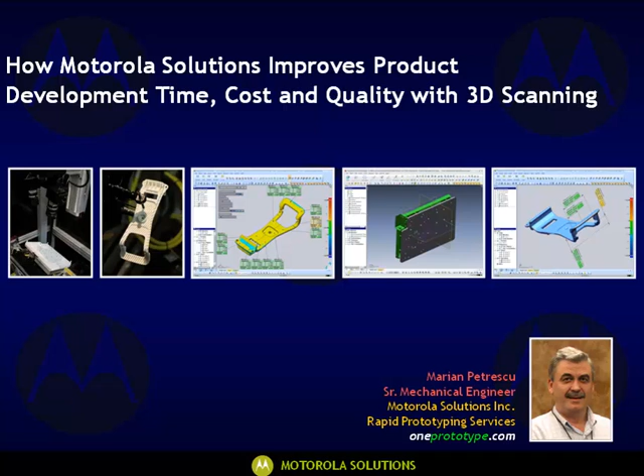As outlined, I'm going to talk shortly about who Motorola Solutions is, who Capture3D is, who Rapidform is.

Then our product development needs at Motorola, and what we used for selecting a good metrology system. We're going to mention the motion control automation system from Capture3D.

We're going to talk about our software tool set for our metrology system, and we're going to talk in detail about Motorola's application using Rapidform XOR and Rapidform XOV as software for redesign, reverse engineering, and analysis and verification.

Finally, we're going to talk about the impact on Motorola's products, introducing our metrology system, a couple of words about future efforts, and finally, we're going to summarize everything.

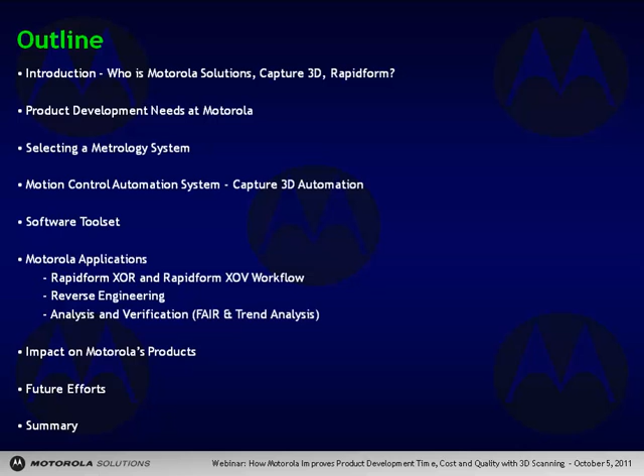Who is Motorola Solutions? Motorola as a company was founded in Chicago, Illinois in 1928 as Galvin Manufacturing Corporation.

The first products Motorola produced were the battery eliminator, which was actually an AC power adapter, and car radios called at the time Motorolas or Victrolas. Over time Motorola produced police and military radios, transponders for space programs, microchips, pagers, cellular phones, televisions, satellites, and so on.

Since January 2011, Motorola separated into two distinct companies, Motorola Solutions and Motorola Mobility.

Motorola Solutions, the company I work for, is a communications company producing trunked radio systems and software for local, state, and federal governments, for police and fire departments, and produces price scanners, which we call Symbol from the former company that produced them.

We also produce mobile computers, postal terminals, and RFID systems. Our facility was founded in 1973 in South Florida, Plantation.

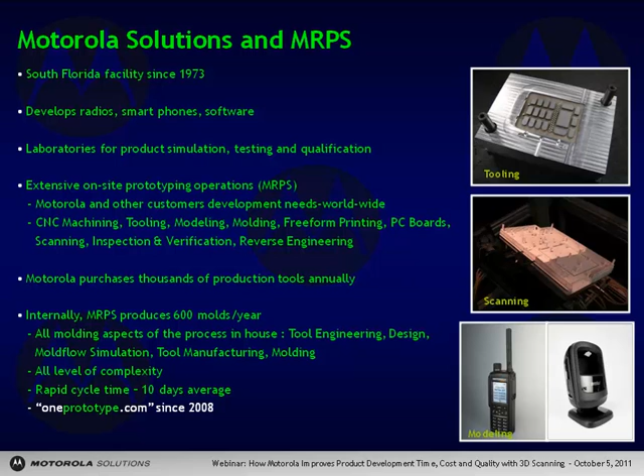Who is Capture3D? Capture3D is a company founded in 1998. The company is headquartered in California and has other offices in Washington, Texas, Michigan, and Connecticut.

Capture3D is a North American integrator of GOM Germany 3D optical measurement solutions, which produce the ATOS 3D scanner and TRITOP digital photogrammetry. Capture3D has over 4,800 system installations worldwide.

It is a company with in-depth process knowledge and experience in various industries like automotive, aerospace, consumer, power generation, casting and forging, injection molding, etc. It is also a developer and manufacturer of standardized and custom automated motion control and robotic solutions.

By the way, we have an automated motion control system introduced here by Capture3D.

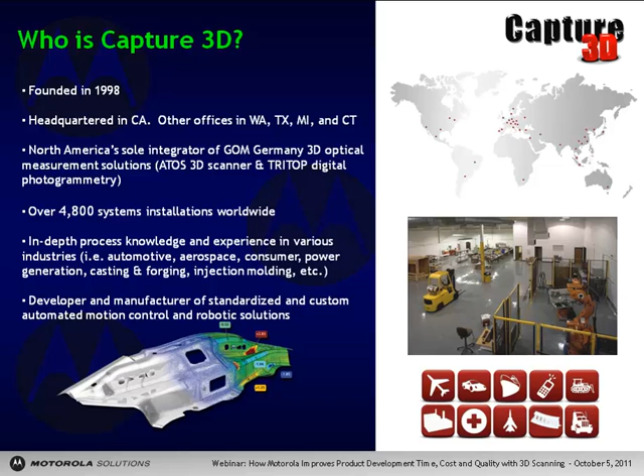Capture3D is also specializing in implementation of high-quality measurement systems and software solutions to aid quality control inspection, rapid prototyping, reverse engineering, CFD, FEA analysis, and additive or rapid manufacturing.

A couple of things about the ATOS 3D scanner, which we have here in Plantation. It can capture rapid geometry, accurate high-resolution data, and is reliable with a stable system architecture. It can measure small to extra-large objects in various configurations: semi-automation, complete automation, portable, laptop, robotic, etc.

Also, Capture3D has an intelligent operating and processing software developed by the same company.

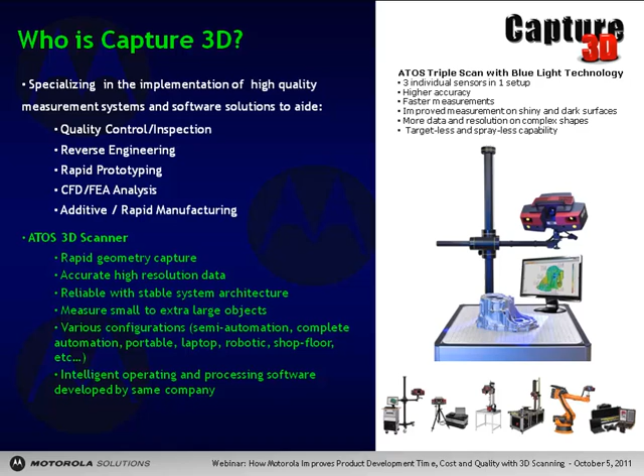Who is Rapidform? Rapidform is a software for reverse engineering and inspection, headquartered in Korea with offices in Denver, San Francisco, Frankfurt, and Tokyo. Rapidform is a global leader in 3D scanning software, with more than 10,000 seats in use worldwide since the company was established in 1998. It's used at Motorola, at 9 of the top 10 automakers, at 7 of the top electronic manufacturers, and at 9 of the top 10 aerospace companies. They are the inventor of parametric reverse engineering software and also the inventor of parametric inspection software.

A couple of things about Rapidform XOR software, the software for reverse engineering: it creates parametric CAD solid models from scans, the fastest path to CAD. It creates native files for ProEngineer, SolidWorks, and other design systems such as CATIA, AutoCAD, and Unigraphics.

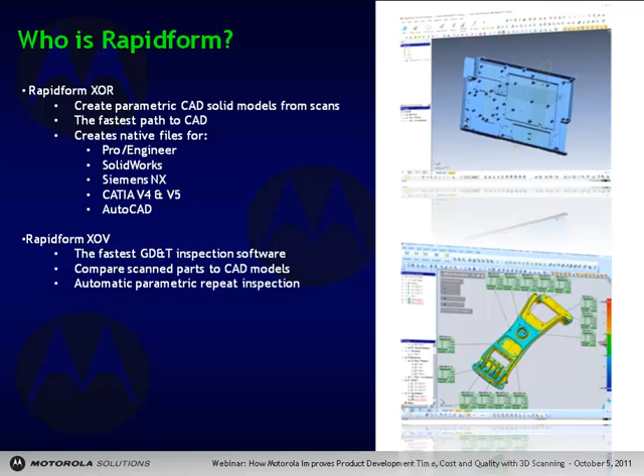Rapidform XOV, the software for analysis and verification, is the fastest geometric dimension and tolerance inspection software. It compares scanned parts to CAD models with automatic parametric repeat inspection. We call this parametric inspection, where the inspection path for a part is used for multiple parts.

Now we're going to talk a little bit about implementation of the 3D scanning metrology system at Motorola. We started with our product development needs at Motorola, where we needed different tools: tools for design, tools for prototyping and modeling, experimentation and testing, and tools for analysis and verification.

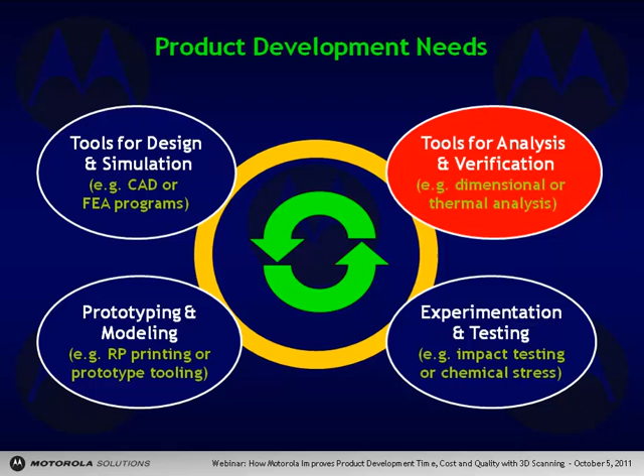We focus more on tools for analysis and verification. Here was the kind of activity that we paid attention to when introducing a 3D scanning metrology system. We had to consider the best choice in implementing the best 3D scanning metrology system.

We have certain applications in dimensional analysis and verification. Our applications are part inspection, part and assembly interaction, part qualification, before and after process or test comparison, tooling cavity number and supplier comparisons, root cause analysis, legacy ID models, and third-party product support.

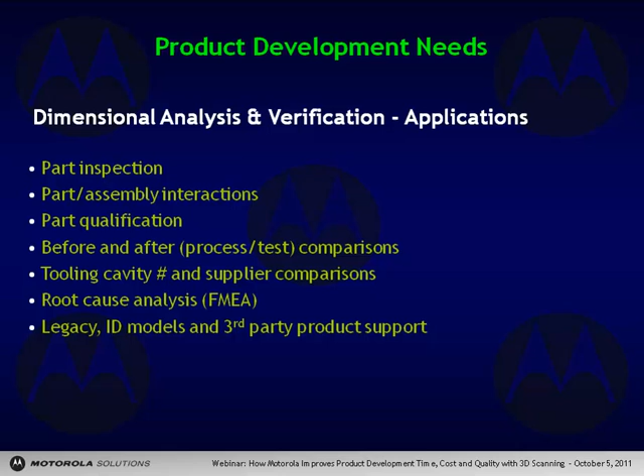We also have certain components for dimensional analysis and verification: injection molded plastic parts, insert and over-molded plastic parts, die-cast parts, machined and formed metal parts, compression molded parts, PC boards, and sub-assemblies like switches, speakers, and connectors.

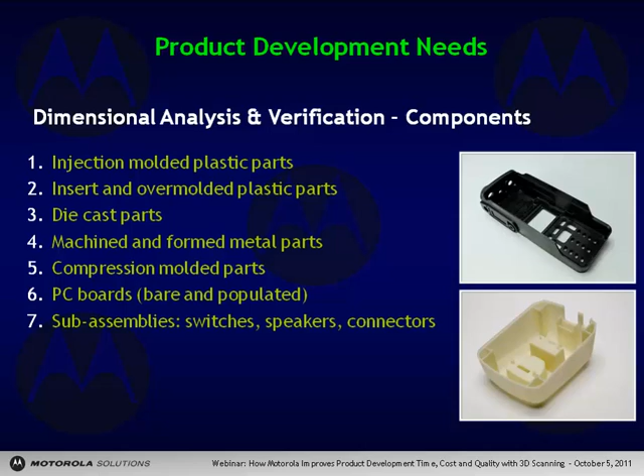Another factor to consider in choosing the scanning metrology system is the system requirements for our projects here at Motorola Plantation. In order of importance for us: speed for setup, scan and post-process; accuracy and repeatability; ease of use for physical process and software; and automation capability, which requires an inspection volume of 300 millimeters cubed, or weight of 5.5 kilos, 12 pounds.

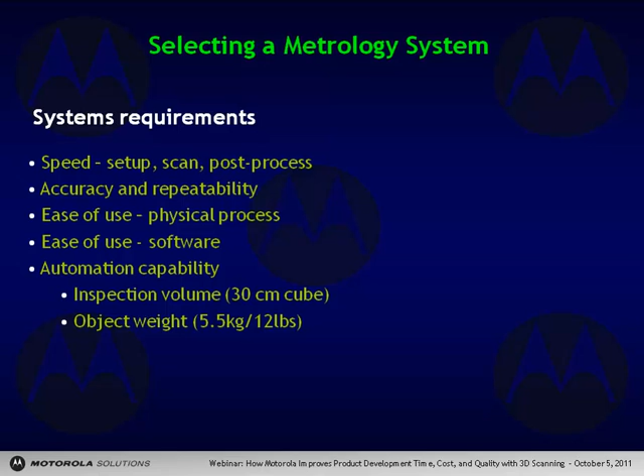If we have some questions at this point.

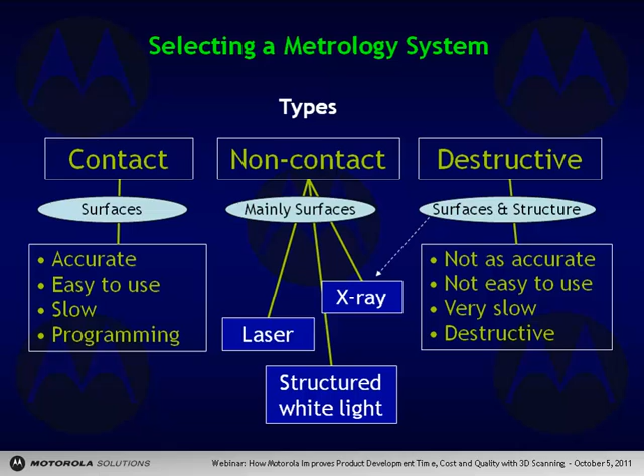After a deep analysis using DSS Digital Six Sigma methodology, a project called Define, Measure, Analyze, Improve and Control, the DMAIC project, we chose from non-contact types the structured white light system. Of course, this was based on what we talked about before regarding our application, our components, the system requirements, the system types, and also the return on investment. This was a very important factor.

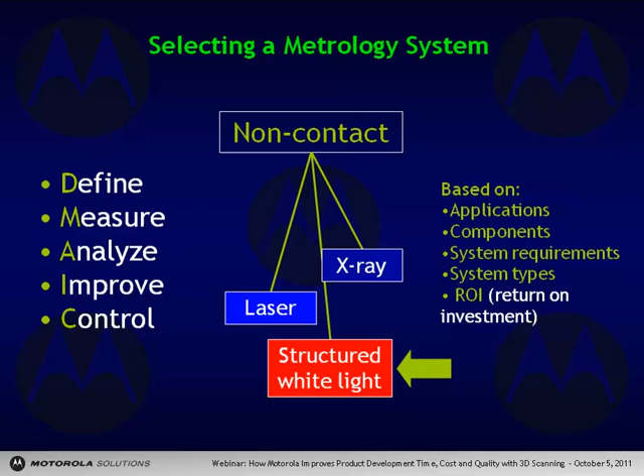So our metrology system looks like this picture. You see the enclosure of automation. We have a 6-axis automation system from Capture3D with the camera system in it. Then we have the PC units here with hard drive, with software interfaces for inspection, for capturing data, and for the automation system.

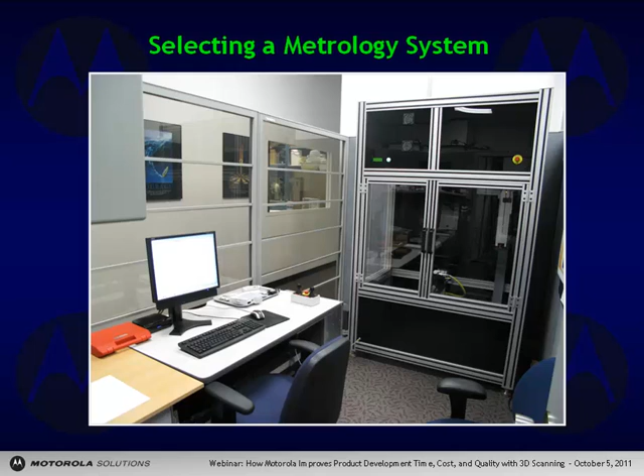So our system consists of a computer unit and the Atos 3D scanner from GOM, Capture3D, an operating software from GOM, V7 Professional, installed by Capture3D, an automation system by Capture3D, motion control automation system, system integration software from Capture3D, and we are also using some tooling and fixturing made at Motorola.

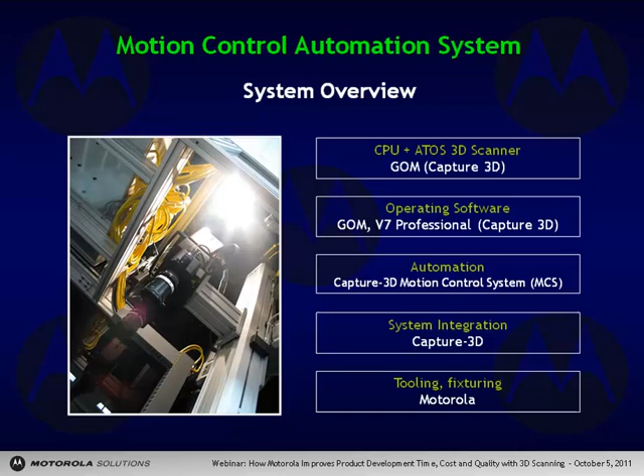So the automation system has 6 axes, 3 rotary axes and 3 linear axes, and also the scanner head assembly is attached to this automation.

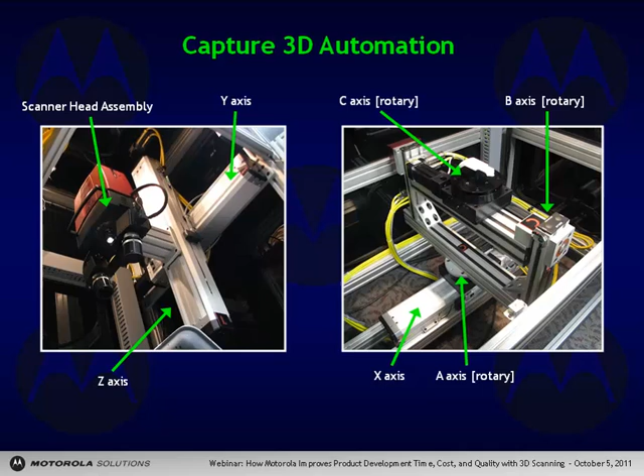What characterizes the Capture3D automation? We can program an automation template, a program, or a protocol for multiple scanning sequences. The automation can achieve any physical orientation, retaining positioning accuracy within 5 microns, which ensures the repeatability and reliability of the system. The template can be rerun by the automation on multiple parts. Also, the system stores templates for different inspection volumes or part orientations.

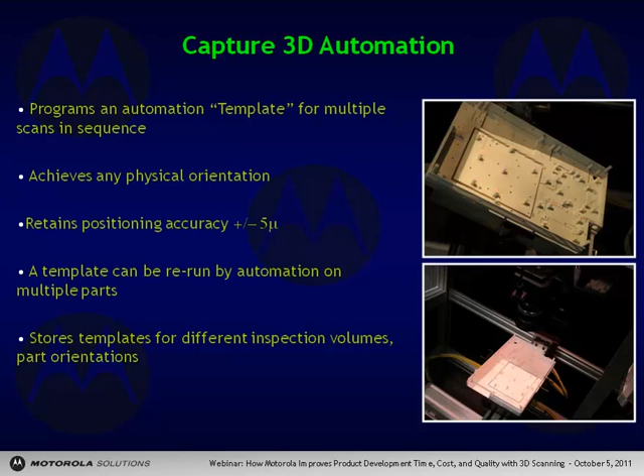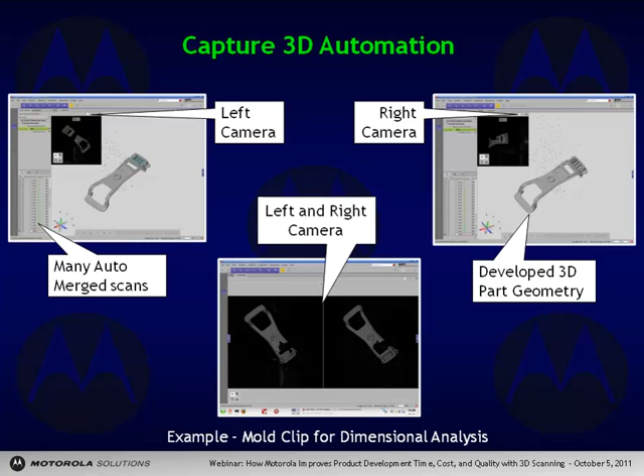This is how V7 Inspect Professional looks like. In scanning a mold clip for dimensional analysis, you can see both cameras, left and right, capturing the data. You can see here on the left how many scans are merged, forming a developed 3D part geometry, and also you can see the scanning process in the picture on the bottom.

For larger parts exceeding 300 millimeters cubed in volume, we can scan them with the automation provided by Capture3D, but we need to limit the number of automation axes in order to avoid any damage to the automation. We can scan weights up to 15 kilos or 30 pounds with full automation, which is very good.

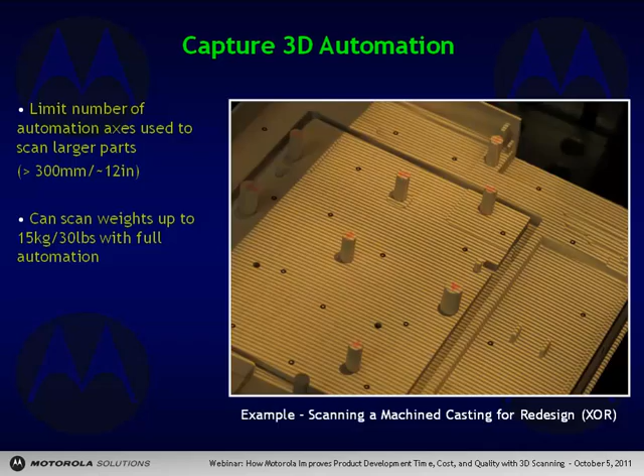In addition to this automation, for reliability and repeatability of the system, we use very simple and low-cost holding fixtures such as frames, clamps, or custom mandrels for special parts like flexible parts. In this picture we can see a flexible keypad made of rubber material. So we pretty much cover all the volume for the automation system in fixturing and tooling for scanning.

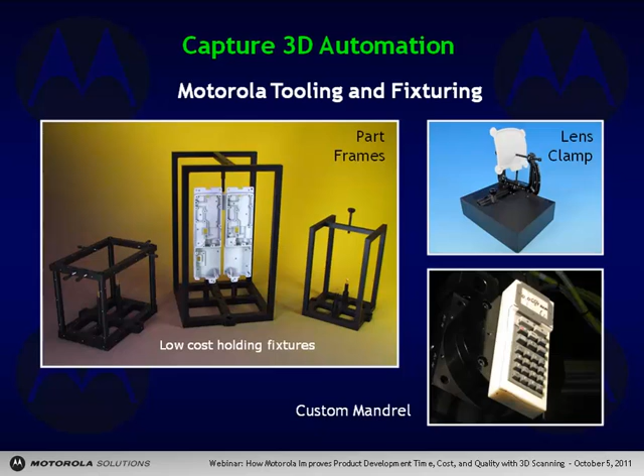As a software tool set for our metrology system, we use design software like Pro-E, iDEAS, SolidWorks. For manufacturing, we're using Mastercam and Cimatron. For dimensional verification, we use scanning software, Capture3D GOM Atos, inspection software, Capture3D GOM Atos V7 Professional, and automation system integration from Capture3D.

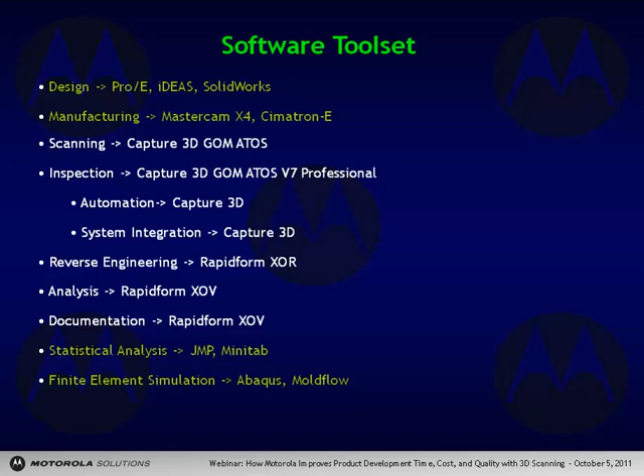Also, we are using reverse engineering software from Rapidform, actually Rapidform XOR. For analysis we are using Rapidform XOV, and for documentation we are also using Rapidform XOV. We have some other software for statistical analysis like Minitab, and finite element simulation like Abaqus or MoldFlow.

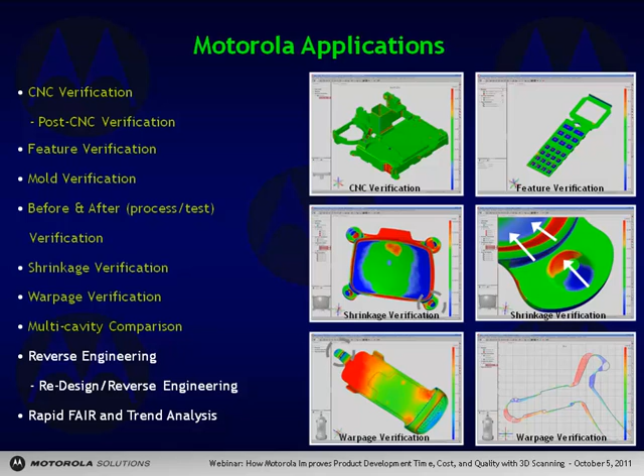Today we focus on reverse engineering application using Rapidform XOR and analysis using Rapidform XOV.

What we use reverse engineering for in our application — most of the applications are about retooling legacy parts with missing or uncertain design data. Our case study today is about capturing legacy design data for creating a new or modified version of products or accessories. Capturing design intent from physical parts, understanding competitive products and models, is another application, as well as creating accurate data for third-party products and accessories to ensure compatibility.

For analysis and verification, we can use all parts, tools, and accessories requiring analysis and verification, of course within the limits of our automation and our scanning system.

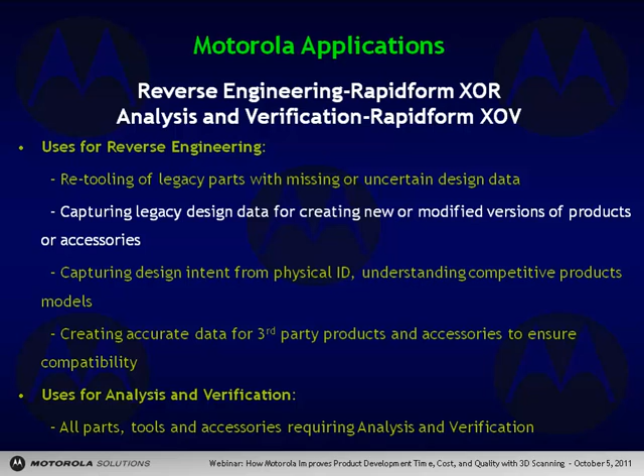Before talking about a case study applying Rapidform XOR for reverse engineering, we're going to show the Rapidform XOR workflow here. So the first step is to import the mesh from the Atos 3D scanner into the Rapidform software. The second step is to align the mesh into the coordinate system of the Rapidform software. Then comes auto feature segmentation, when the software gives us a clue about all the geometries of the scanned part of the mesh data. The next step is to create the CAD model in Rapidform XOR.

Then check the accuracy of that model against the scan data to see how close they are, and basically verify the accuracy. The last step is to LiveTransfer it into a CAD software, either Pro-E, Unigraphics, or another CAD software.

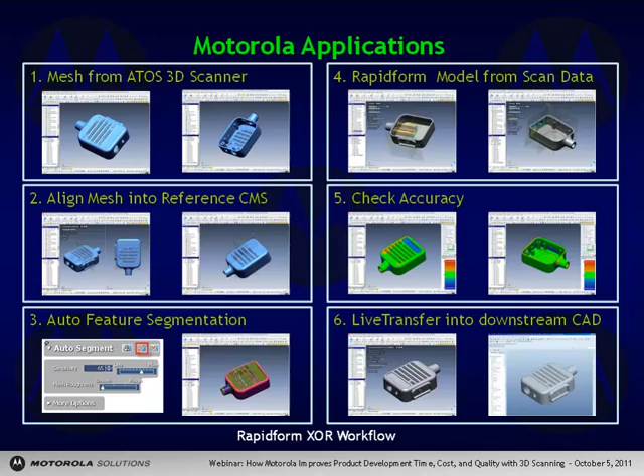So our application case study today refers to a legacy part, a part which doesn't have a good design.

The customer had some issues with a fixture built for this chassis legacy part for assembling some components and boards on the chassis. So for the screw template, the customer is reporting that if he matches up the screw location according to the print, the holes on the fixture template will end up misaligning against the PA heatsink.

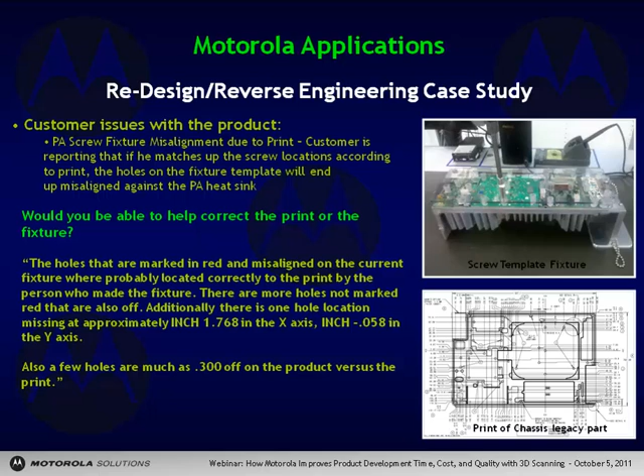So the customer is asking to help correct the print or the fixture. We decided to correct the fixture, capturing the pattern of the holes on the chassis, and having that pattern we also can fix the drawing. So we concluded that the screw fixture and the print do not match the holes pattern on the chassis.

The chassis was modified in the past for heatsink attachment. The holes pattern needs to be captured from the chassis heatsink assembly and the screw fixture redesigned. For this, scanning to capture the holes pattern and reverse engineering are required.

Also, we got the message that the customer tried to use traditional methodologies to solve this problem, and they failed. Probably they failed just because the geometrical feature on the bottom to be captured, the bottom of the holes, because the holes are so small and they're also tapped holes, it's very, very hard to capture them.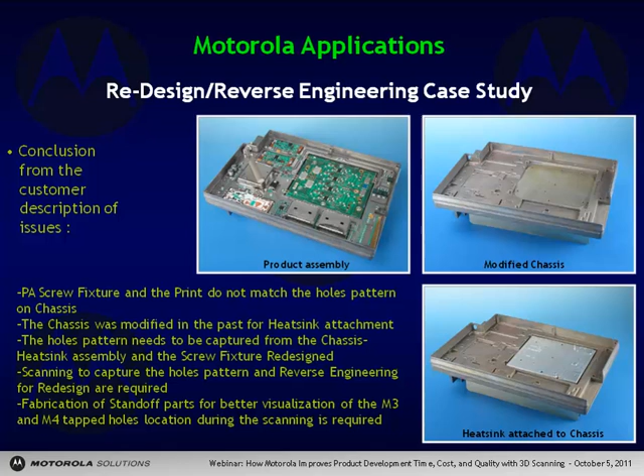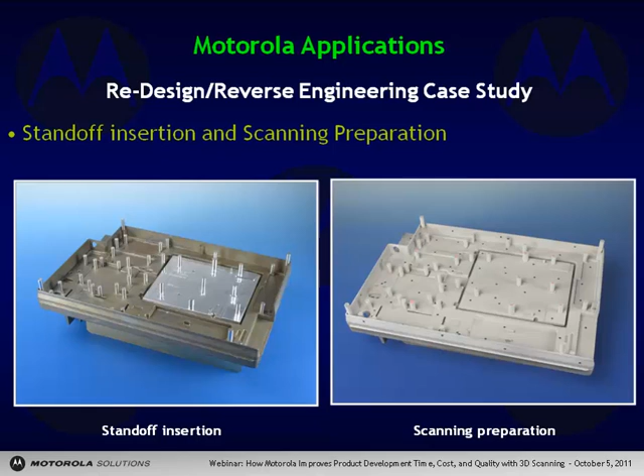So we decided to fabricate some standoffs to better visualize all the holes from the chassis. This was a good step and good idea, because going forward with these standoffs we can easily scan the assembly chassis. So after standoff insertion we made a scanning preparation.

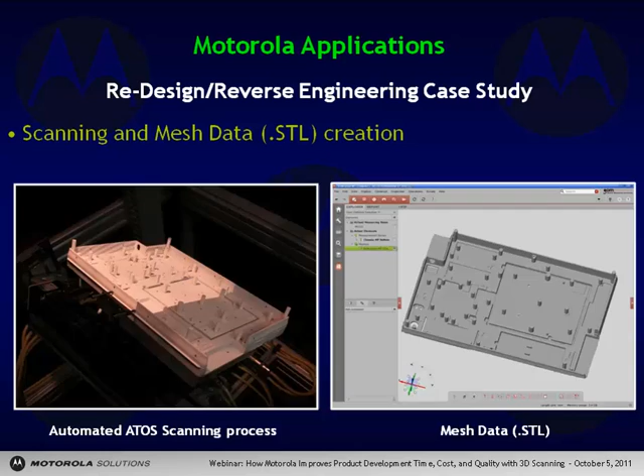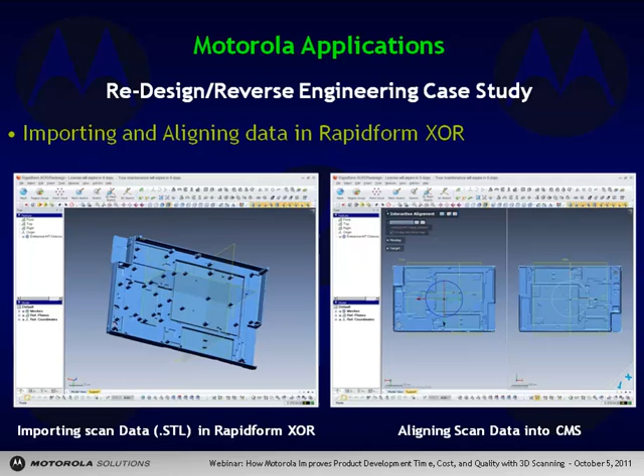We scanned the part with the ATOS automation system. We obtained the mesh data, an STL file, and next we imported that scan data into Rapidform XOR. We aligned the data into the coordinate measurement system of the Rapidform software.

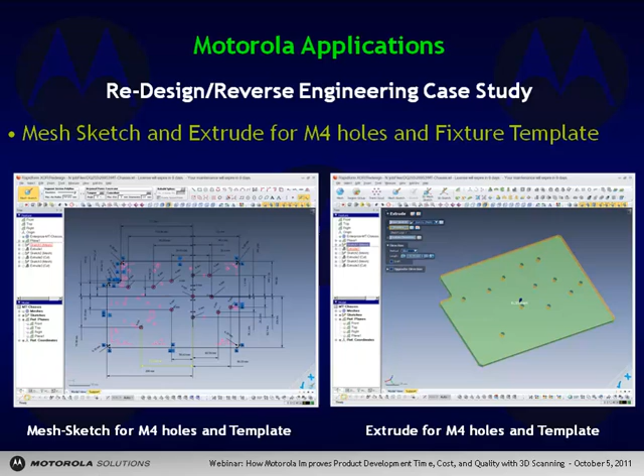We started to model a template for the fixture using different mesh sketches in the Rapidform software. This is one of the mesh sketches for a certain type of holes, tapped holes. This is another mesh sketch for corner alignment holes, and then we cut the corner alignment holes into the template already created.

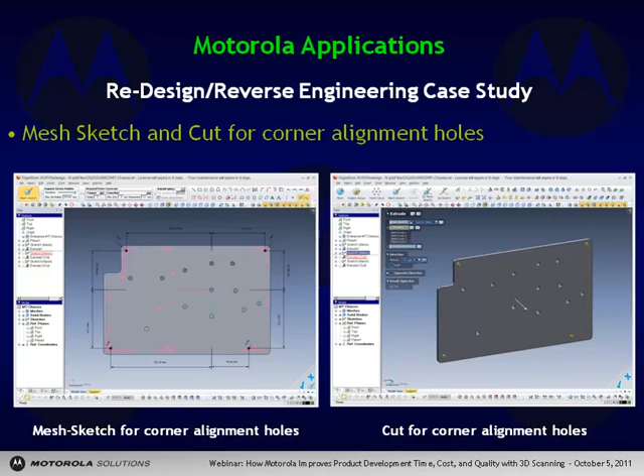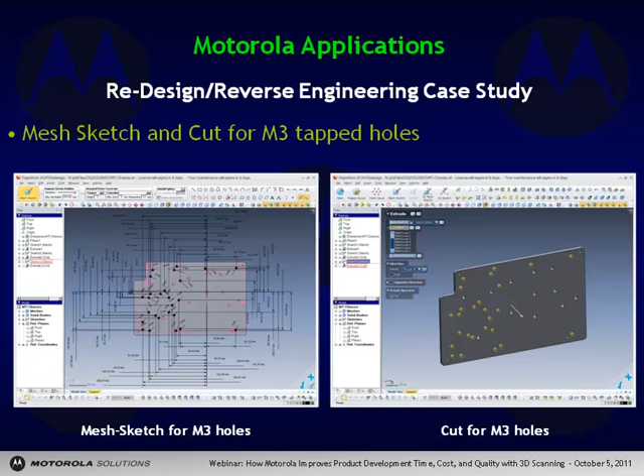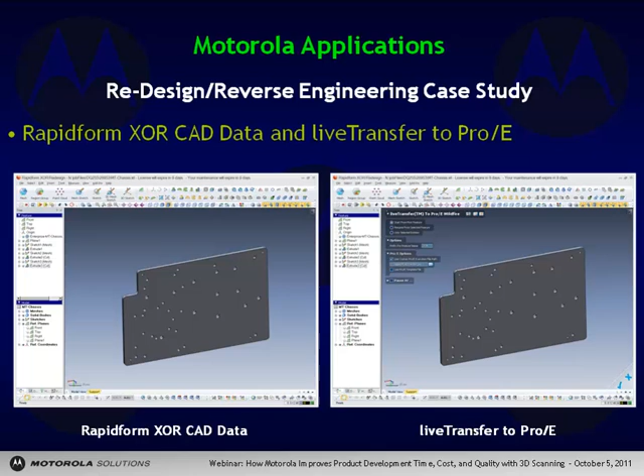Another mesh sketch for another type, M3 holes, and the cut into the 3D model in Rapidform. Finally, we got all the pattern of the holes into the model. We created the model in Rapidform and did a live transfer into ProE software.

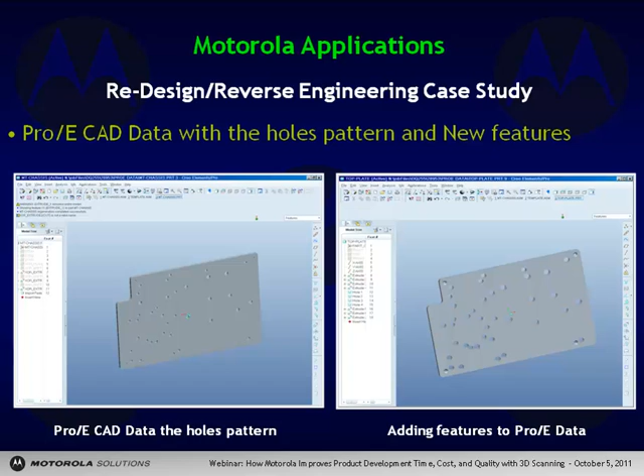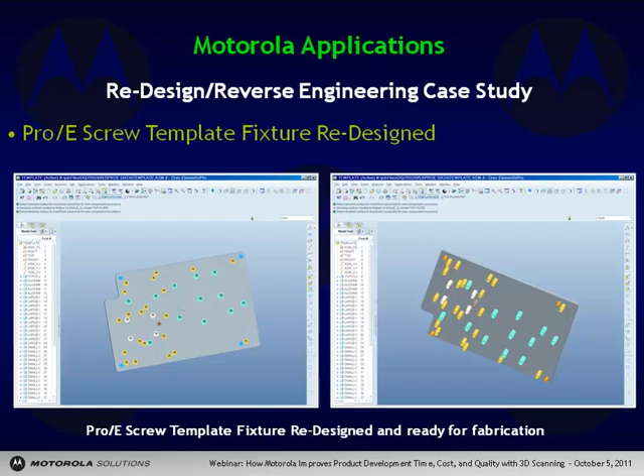Using ProE, we just modified the holes in order to insert all the guides for the screws. And finally, we got the fixture redesigned and refabricated. You can see the fixture fabricated here, and the physical fixture on top of the chassis, working in assembling all the boards and components. So the customer was very happy with this job.

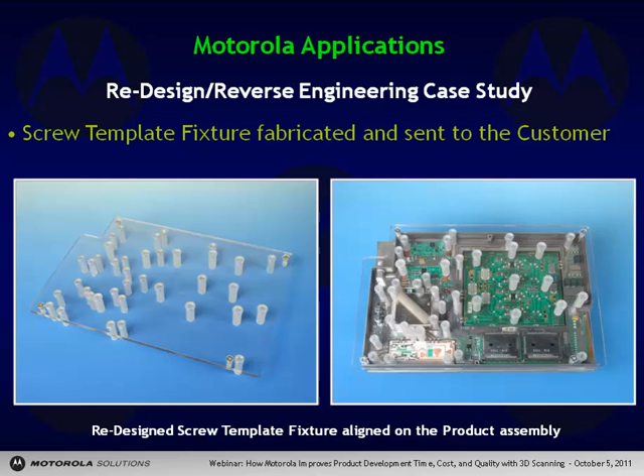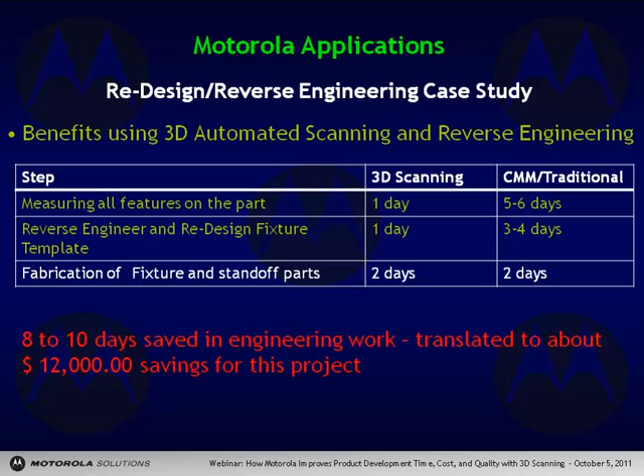For this redesign reverse engineering case study, we spent about 1 day measuring all features on the part, 1 day for the reverse engineering activity, another day comparing with the traditional methodology in measuring all the geometrical features, and with traditional methodology to reverse engineer and do the redesign. We saved about 8 to 10 days in engineering work, which translates to about $12,000 in savings for this particular project.

Again, if there are some questions at this point.

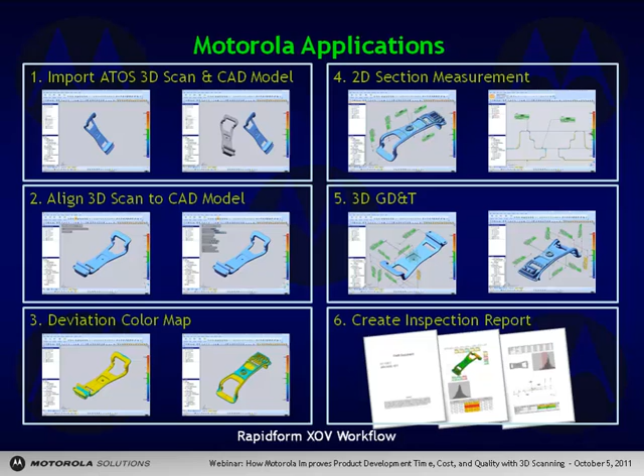Our case study, analysis and verification application: one of Motorola's internal customers requested the tooling and fabrication of several hundred molded lanyard clip TSD plastic parts. The order was very important for our RPTC mold team, the clip being a part of a retail assembly product to be released on the market.

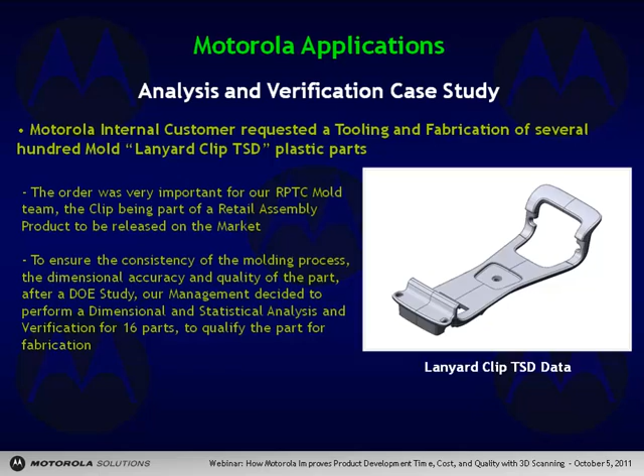To ensure the consistency of the molding process, the dimensional accuracy and quality of the part, after a design of experiment study, our management decided to perform a dimensional and statistical analysis and verification for 16 parts to qualify the parts for fabrication. So we start the process with the first step, scanning and creating the mesh data for all the 16 parts.

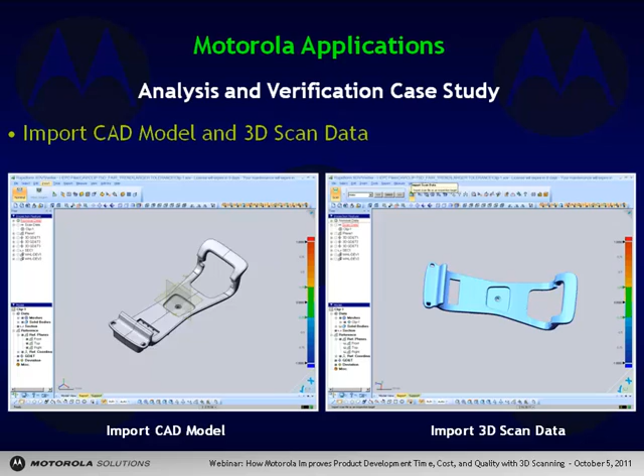Then we import the CAD model into the software along with the scan data, and perform alignment of the 3D scan data to the CAD model. We generate a deviation color map showing hull deviation, in this case for the top or the bottom, and we can also do thickness or all deviation analysis.

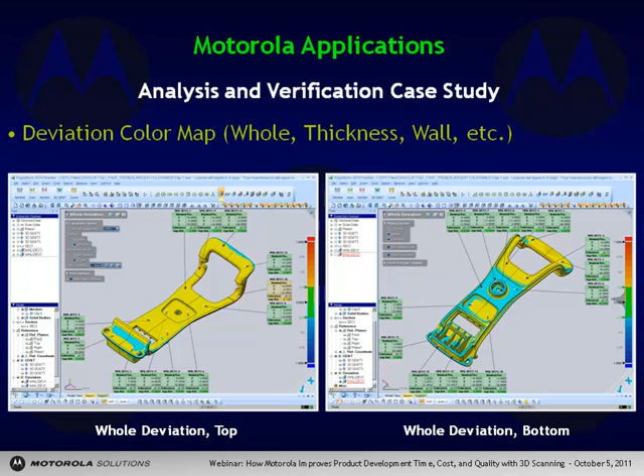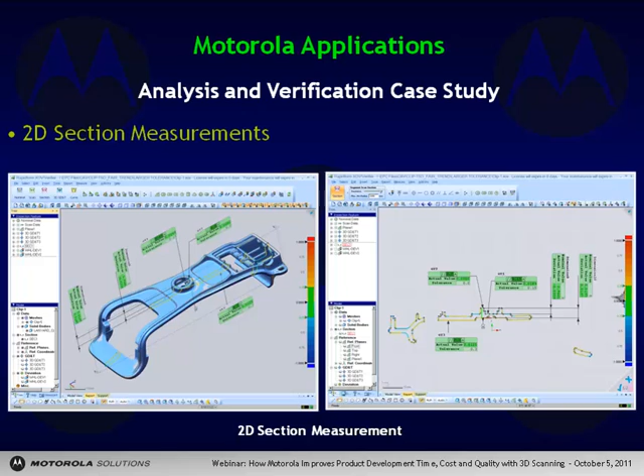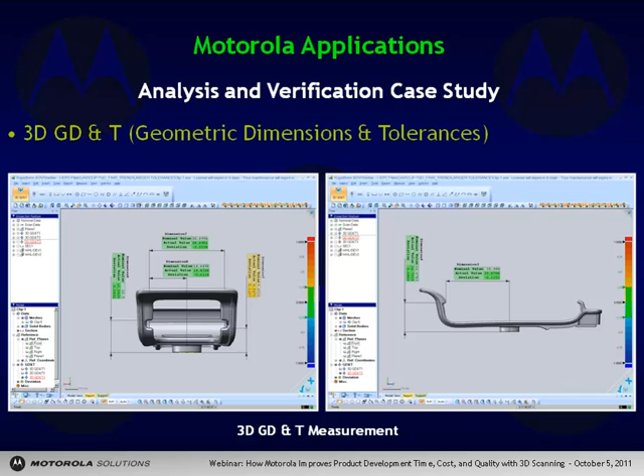Also, we created 3D geometric dimensions and tolerances on different views. Finally, we created an inspection report, a first article inspection report, for each one of all 16 parts.

The reports contain a page with information about the project and the customer, then a database, then the scan data, and then images with two-dimensional sections showing all critical dimensions, all the views with 3D geometrical dimensions and tolerances, the values for all the dimensions, and the whole deviation pages. This is a complete rapid first article inspection document.

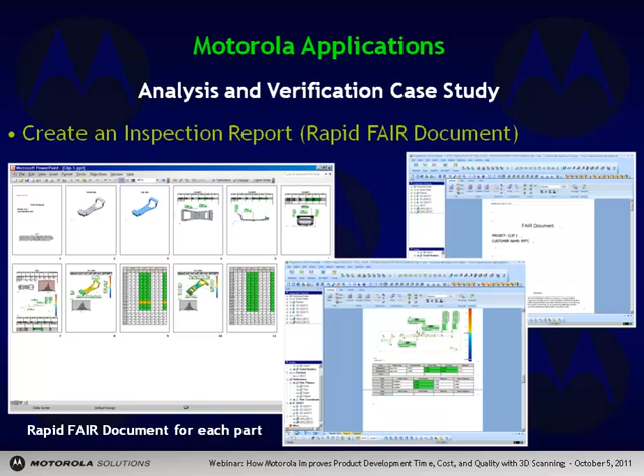For a deeper analysis and verification based on all 16 rapid first article inspection documents saved, we can create a trend analysis report with deep analysis and statistics for each dimension. This is a very, very deep verification with all the dimensions in tables, including statistics like upper limit, lower limit, Cp, Cpk values, and the full spectrum of deviation for each dimension.

So finally we got the trend analysis report with a page informing about the project, customers, and part details, followed by pages with all the statistics for each dimension, for each 2D section, and for the 3D geometric dimensions and tolerances.

After this analysis, we are confident that our process goes well, and we can process the request from our customers, and we release the part and tooling for fabrication.

The benefits of using 3D automated scanning and inspection in this case: we use a Motorola formula. You can find a lot of ways to calculate productivity, but in our view, the most important thing is to include a factor for increasing available data, referring to the key dimension and surface thickness variation.

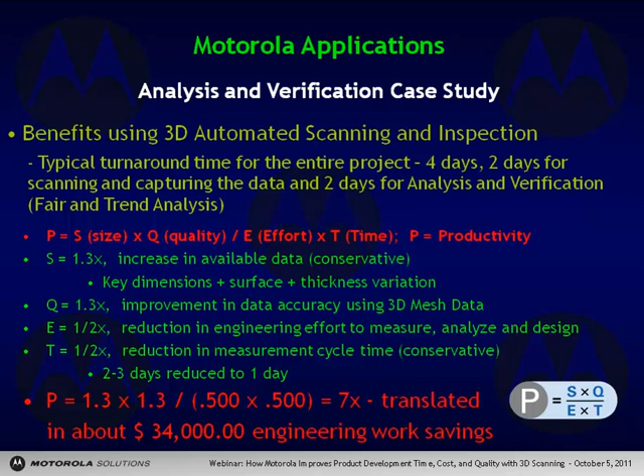The impact on Motorola's products by introducing our metrology system, the 3D scanning metrology system, is very important. After an investment of $250,000 and additional software investment, considering that we're averaging 100 projects per year, we reduce problem-solving effort for a lot of development parts, assemblies, and supply chain issues.

Also, we reduce part qualification times. Now we have an in-house solution for retooling of legacy parts, and we also achieved a positive return on investment in less than 18 months.

For the future, we have things to improve in our activity: to broaden the implementation of rapid FAI in our inspection activity, to have more in-depth statistical analysis of scan data software, to integrate more with simulation tools like Abaqus, Autodesk Moldflow, and to extend surface texture measurement and CT technology, which emphasizes exporting 3D part data based on effective segregation by density.

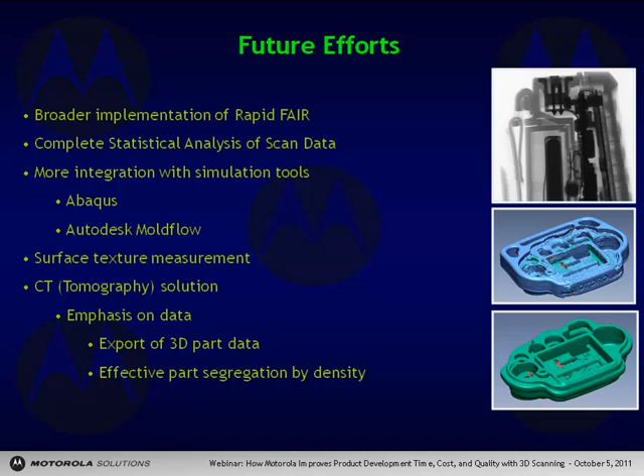We also need to implement the latest technology from Capture3D, triple scan with blue light technology. To summarize, we can conclude that the Capture3D solution, GOM scanner and automation, has met our measurement needs.

Addition of Rapidform software has expanded the application and capacity of analysis. We achieve speed, accuracy, and ease of use for the systems and for the software. We achieved our return on investment goal in less than 18 months, and we can now support many product development projects and help resolve many production and supply chain issues.